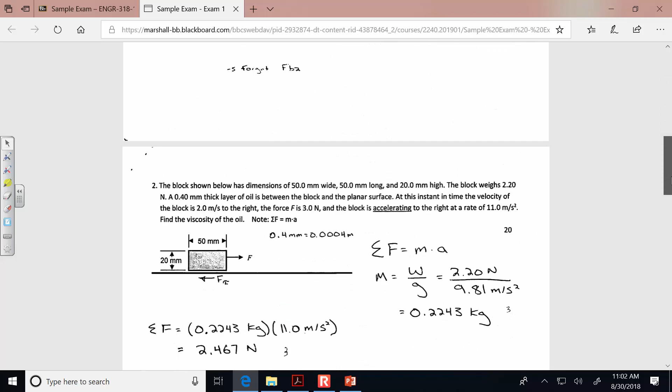All right, so here you can take a look - usually for our exams there will be 3 questions, sometimes 4. But what I'd do is instead of having 3 longer questions, I'd have 2 longer ones and 2 shorter ones. Usually the exam is 3 pages long, and you'd have 75 minutes to complete it in class.

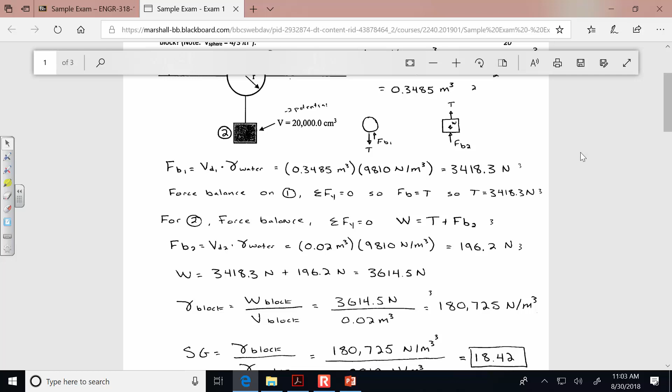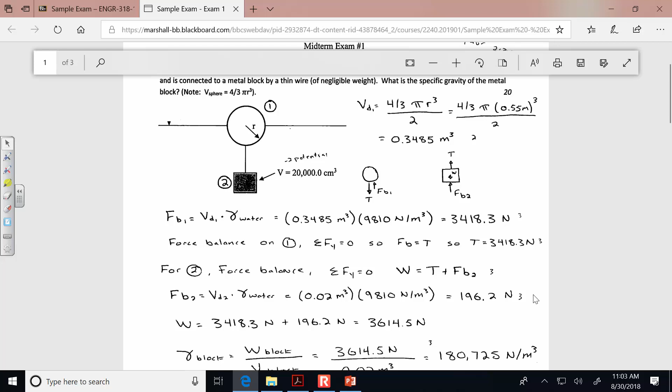And so you can see on this one, if it's worth 20 points, I'm kind of breaking out where the points are earned. So if you only do part of the question, you get part of the credit. And so there you have it - there's a sample exam online. You can look over it and get a feel for what to expect on the tests.

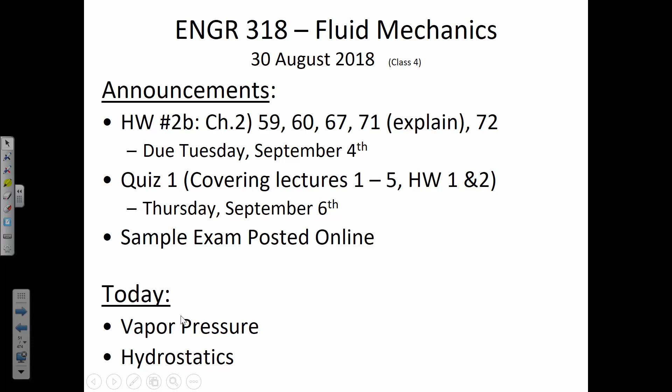All right, so today we're going to be talking about vapor pressure and hydrostatics. And what's going on in this picture? What are we looking at? Boiling water, right. And in this case it's boiling water because heat was added.

It doesn't seem like that's something that should need to be clarified, but there's more than one way to boil water. It just happens that in this case the water was heated to get it to boil. Why do you have to heat up water before it will boil? Why won't it just boil at room temperature? Are there other things that will boil at room temperature? What's an example? Like if we had a liquid, just a container of it, sitting in this classroom, what would boil at room temperature? Propane, butane, right - yeah, those are liquids when they're compressed, but they want to go into the vapor phase at our normal room temperature and pressure.

Water, though, will go into the vapor phase too. When I say phase, there are 3 states of a fluid like water. It can be ice as a solid when it's below 0 Celsius. It's water within a relatively narrow band of temperatures from 0 to 100 Celsius. And then after 100 Celsius, the water wants to become a gas. So that's what's going on here - the water has been heated up to a temperature where it wants to be in the vapor phase.

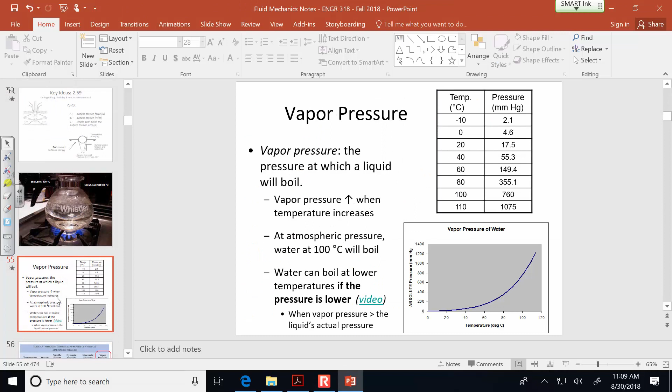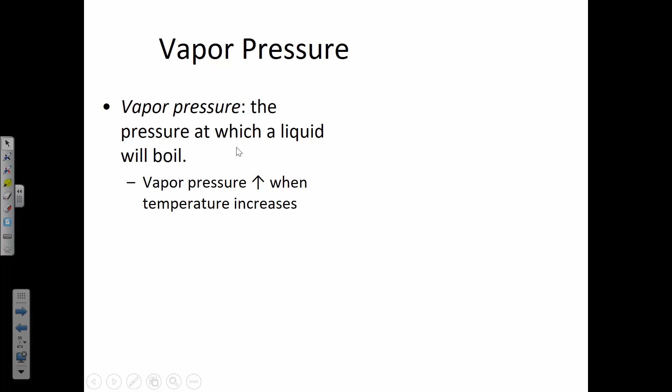The term vapor pressure is the pressure at which a liquid will boil, and vapor pressure goes up as the temperature increases. Here's a table that illustrates that temperature dependence.

When water is cold, it has very little kinetic energy, very little molecular movement, and so there isn't enough pressure within the liquid to get out into the atmosphere. But at 100 degrees Celsius, there's an equality between the vapor pressure of water and the atmospheric pressure. This is measuring pressure in terms of millimeters of mercury.

If you remember from chemistry, one atmosphere equals 760 millimeters of mercury. So at 1 atmosphere, the vapor pressure of water is 1 atmosphere at 100 degrees Celsius.

It's ironic to see that there's still a vapor pressure below zero, so ice can evaporate. There is sublimation, which is the direct transfer of water from the solid phase to the gas phase. Here's a graph of this same data.

What it shows is a nonlinear response, so as you heat up the water, the vapor pressure increases dramatically as you approach the boiling point. At atmospheric pressure, water will boil at 100 Celsius. The water can boil at lower temperatures if the surrounding atmospheric pressure is lower.

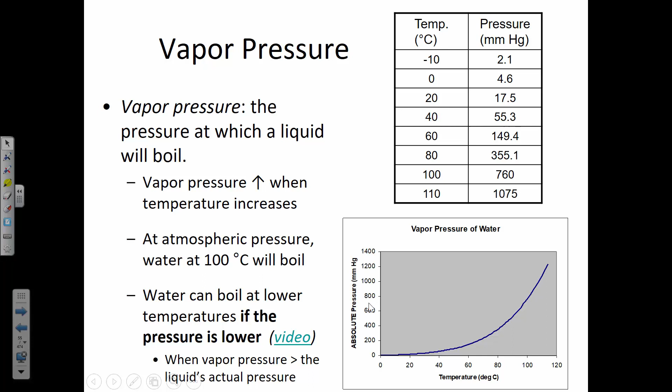So let's watch this video.

You got the clue when he put his fingers into the water that it wasn't hot. He was fishing out the pasta in a way you probably wouldn't put your fingers into boiling water. In fact, quite the opposite, if you let the water continue to boil over the long term, it would freeze, which is really unexpected.

The reason is that for water to go through a phase change, from liquid to vapor, it consumes energy to cross that transition. In chemistry you may remember you have to add a certain amount of heat to melt a certain amount of ice, there's a constant, you can look up how many joules it takes to melt a kilogram of ice. Even though the temperature stays at 0 Celsius through the melting process, it still takes energy to go through it. In the same way, it takes energy to go from liquid to vapor, just to push through that barrier.

So the energy comes from the water, and over the long term, that water will get progressively colder and colder as it's boiling, and then it turns to ice. I found another video that shows this process, where they left it in for several minutes with a thermometer, and you see the temperature decreasing until it starts to form ice crystals.

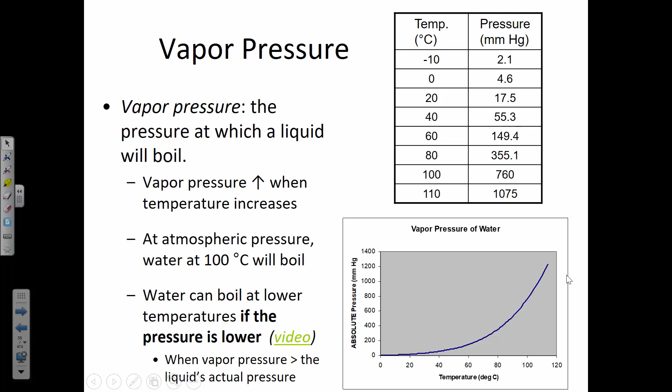Here's another table that illustrates vapor pressure. This is table A5 in your book. The appendices at the back are where, for homework problems, you can look up the vapor pressure at a certain temperature. Here's just another kind of fun gee whiz.

Now, vapor pressure is important in civil engineering, mainly because of the damage that boiling water can do to pumps, pipes, and other engineered structures.

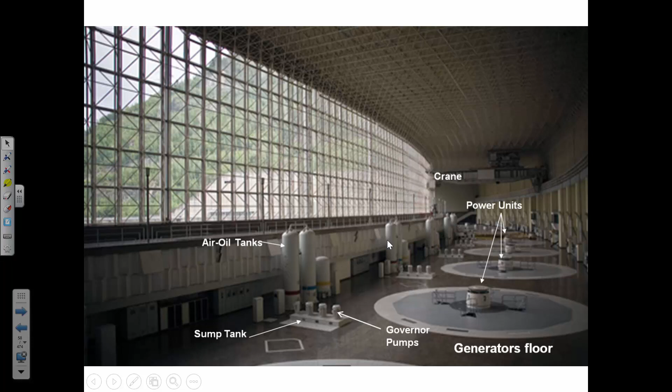There was a dam, with emphasis on the word 'was' - in Russia. The dam's still there, but the power plant isn't. It generated a lot of electricity, a really sophisticated operation, and the electricity was used for aluminum smelting. So the dominant industry in that part of Russia was very closely tied to the availability of cheap and abundant electricity generated by that hydropower.

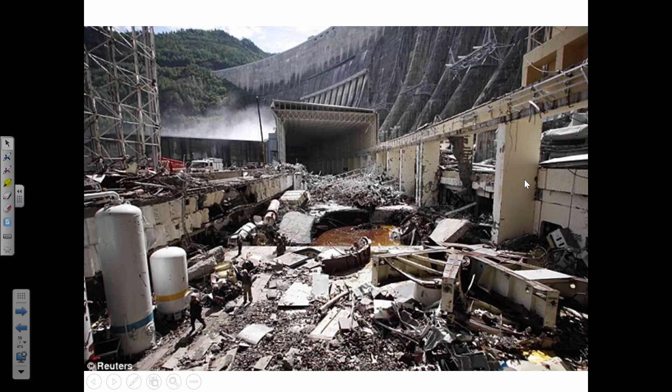Unfortunately, what happened was the place exploded because of something called cavitation. Cavitation is when water is moving very quickly, sometimes its pressure decreases. We're going to be talking about the Bernoulli equation and why there's a relationship between velocity and pressure. But the main thing you need to know is that the water pressure decreased, and in fact got so low that it began boiling inside of the pipes.

When that happens, these little air bubbles form inside the water - cavitation bubbles - and when they collapse, they send a small shock wave through the water, causing corrosion and pitting of pipes. In fact, there have been some dams in the United States threatened by cavitation.

Back in 1983, 1984, there was a really wet spring out in the western United States, and there was - we'll look at pictures later in the semester - a dam that was really heavily damaged because of the same issue of cavitation.

Is that something that can be prevented? It can, yeah. There's a way of assessing the risk or potential for cavitation. In hydraulic engineering, we'll go through calculations for what's called net positive suction head, NPSH, to look at the risk of cavitation. If you get close to that threshold, you choose to construct with different materials - maybe armor the concrete or use a smoother pipe that won't be damaged by the pitting and corrosion those shock waves can cause.

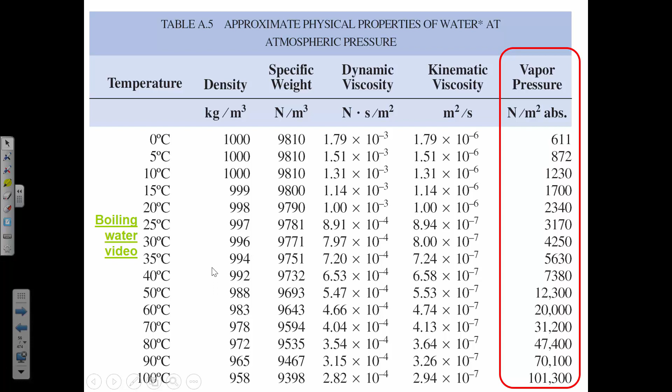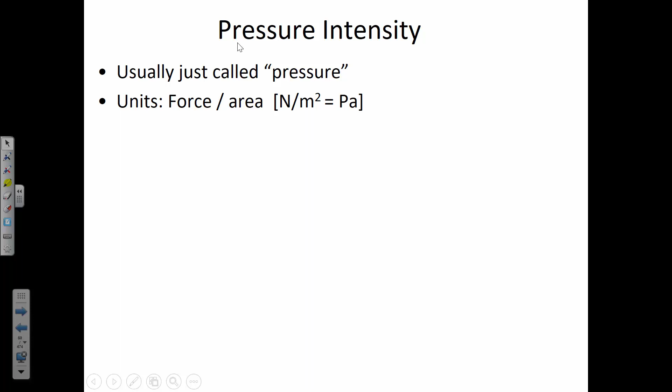I showed you this slide previously when we were briefly talking about pressure. Pressure intensity is usually just called pressure, and the units are force per area. A Pascal is a Newton of force over a square meter of area. That's a Pascal. Pressure acts in all directions equally. It doesn't have direction, it just has magnitude, so it's a scalar.

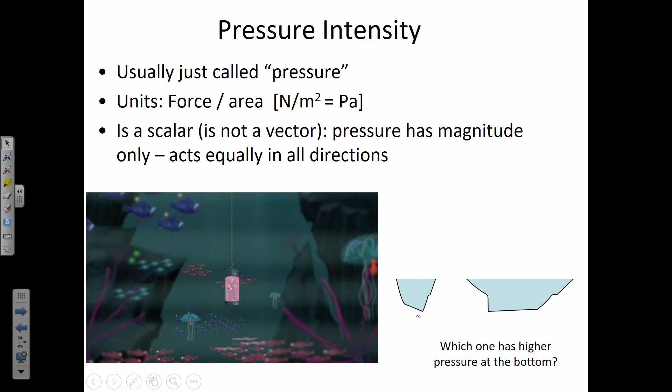You saw right through this trick question I was going to ask about which has most pressure at the bottom, and someone correctly mentioned that it only depends on how deep the water is. It doesn't depend on how wide the body of water is. The pressure at the bottom is dependent on your depth.

So the hydrostatic equation is the formula we use to quantify that. If we have a tank of water, let's say for a starting point we measure our elevations relative to the bottom of the tank. Our elevation datum is here at the bottom of the tank, and we go up some distance and get to the surface. At the surface, the interface between the air and the water, pressure is the same as the air pressure where they touch. But when you go down below that interface, the pressure is gradually increasing, at the rate of gamma.

Gamma is the unit weight of the fluid. Does anybody remember the units of gamma? Gamma has units of newtons per meter cubed. So what we're talking about with unit weight is how much weight is there in a certain volume of water. The hydrostatic equation says as you go down through water, the pressure is going to increase a certain number of newtons per meter squared per meter of depth - newtons per meter squared per meter. For water, the typical unit weight, unless given some temperature specification, is generally 9810 newtons per meter cubed.

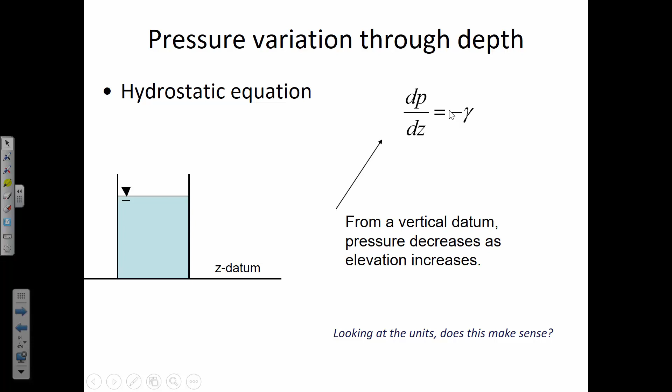Assuming uniform density - meaning if you're going down through a fluid that's just a continuous body of that same fluid, not going through different types of fluid - so assuming continuous density, we could integrate this hydrostatic equation to get piezometric pressure.

Okay, so we rearranged this, and piezometric pressure is saying for a certain location where you're keeping track of your elevation Z above a datum, then pressure plus gamma Z is equal to P sub Z, piezometric pressure. You can rearrange piezometric pressure by dividing each term by gamma, and piezometric pressure can instead be expressed in terms of piezometric head.

The hydrostatic equation says that piezometric head is constant in a fluid. So between 2 points inside this fluid, if this is a liquid, and we've got 2 locations we're interested in, this equation means that if you go down, your Z is decreasing, but the pressure head term is increasing by the same amount. So there's an exchange between elevation and pressure as you go through the fluid.

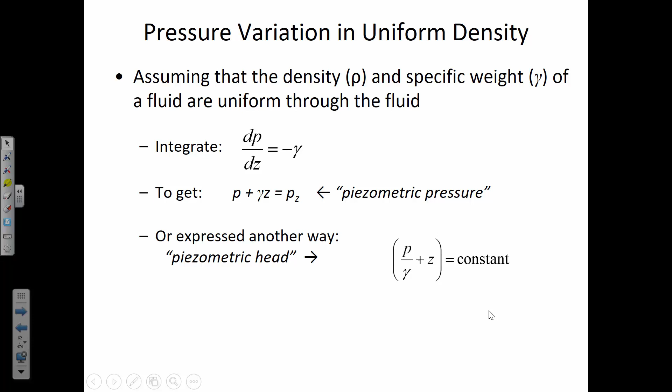Now what happens if you go, so I drew this little line here. If we go down, the pressure is increasing. But what about if you go sideways? What's happening to the pressure then? There's no change. It's just as you go upward and downward vertically through the fluid that you experience a pressure change.

So we can rearrange this original hydrostatic equation, and this is the form we'll use more frequently. What it's saying is: pick 2 points of interest. If you know the pressure at one of them and the elevation at both, then you can calculate the pressure at the other location.

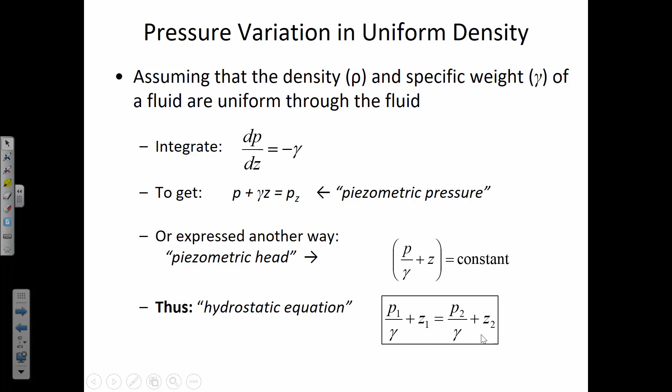So we've got 4 variables here. If we know 3 of them, we can predict the 4th. So let's put that to practice.

Let's say that we have a tank of water here, and we're measuring some elevations according to a datum. Maybe it's the bottom of the tank, maybe it's sea level. It doesn't really matter. We've got some datum, and we're measuring our elevations to both 1 and 2 from that same datum. We know the pressure at 1, and we want to find the gauge pressure at 2.

All right, so we first look at what data we have. At 1, we have the gauge pressure. So what I'd like you to do is, hopefully everybody brought their calculators today, see if you can calculate P2 using this hydrostatic equation. First, calculate it in terms of the gauge pressure, and then for part B, find the absolute pressure. I won't remind you quite yet how to convert between the two, because I want to see if you remember. But we will go over it in just a minute.

Okay, so I have the solution up there on the screen if you want to check you're headed in the right direction. So what we're starting off with is this hydrostatic equation that says the pressure head and elevation head at one location is going to equal the pressure head and elevation head at the other location. That's how we would describe that hydrostatic equation in words.

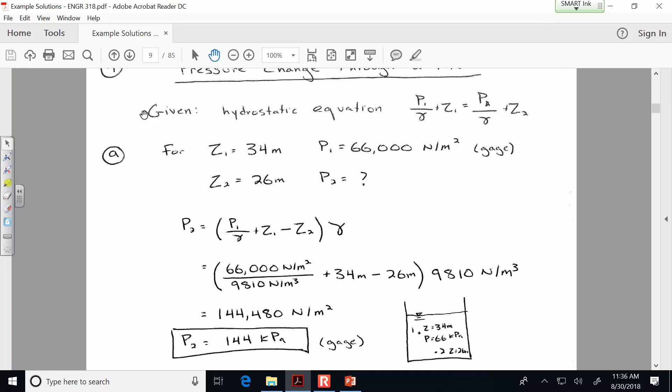So once you have the gauge pressure, what it asked is, what's the absolute pressure at 2? So absolute pressure at 2 is the gauge pressure plus 101.325 kPa. Okay, I'll give you a minute to finish writing that down if you're still copying or doing the calculations.

So this is exciting news, right? Now you can know the pressure at the bottom of the swimming pool. You just measure how deep it is, multiply it by the unit weight, and that's how much the pressure is at the bottom of the pool. Like you could know how strong your ears are. You can see at what depth it starts to bother your ears, and then equate it to a certain pressure.

Anybody here ever do scuba diving before? A few of you? It just seems dangerous. I don't know, we don't belong down there, you know? It's not like fish show up where they don't belong.

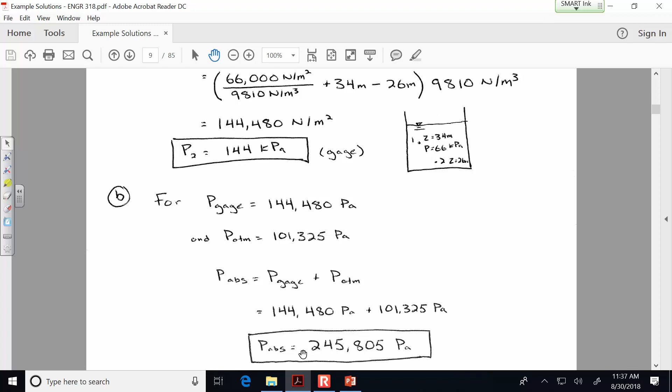There's whales on the beach all the time. Yeah, and are they alive? Yeah, briefly.

So here's the full version of the hydrostatic equation. We can always use this, but sometimes it's convenient to just express it in terms of a change in pressure. So the change in pressure between two points is delta H, the vertical depth, multiplied by the unit weight of the fluid. If you go down, the pressure is increasing. If you go up, the pressure is decreasing.

Here's an example: the Challenger Deep, the deepest point in the Pacific Ocean, off the coast of the Philippines in the Mariana Trench. Some of you looked up the pressure at the bottom of the ocean, right? You probably find that in lots of different sources, but let's calculate it. If the depth there is 10,911 meters, and it's seawater, the unit weight of seawater is a little bit larger than fresh water because of the dissolved salts, 10,100 newtons per meter cubed.

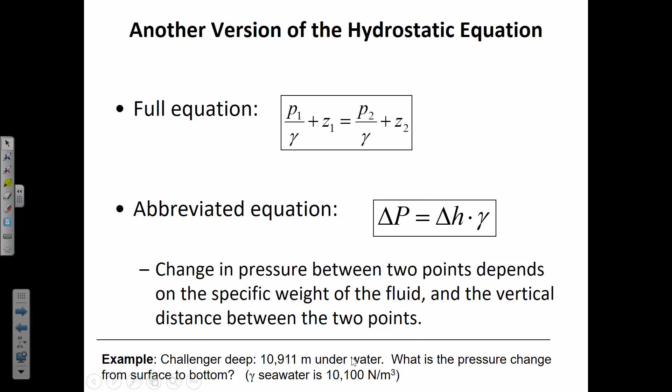Okay, so what if we have two liquids on top of each other? What if we have a layer of oil on top of a layer of water? What I'd like you to do is calculate the gauge pressure at the bottom of the tank. I've given you the specific gravity of the oil, the thickness of the layer of oil, and the total level of liquid in the tank is 4 meters. So get out your calculators and calculate the pressure at the bottom of the tank.

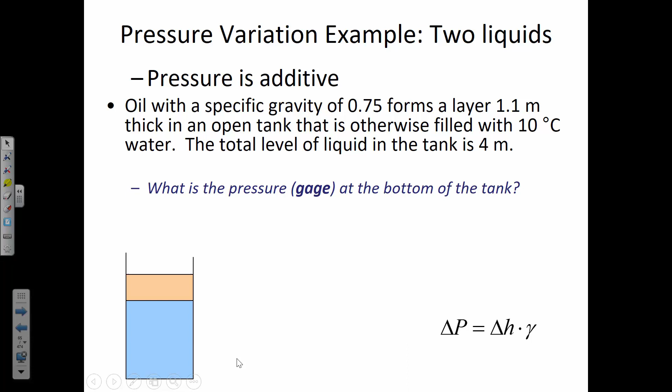Here's the hint: you have to go one liquid phase at a time. You go from the surface, which is an interface of gas and liquid, down to where the oil and water meet. Find out the pressure at the interface between the two, then go the rest of the way down to the bottom. There are two different unit weights, so the pressure is cumulative, additive—as you keep going down, the pressure keeps increasing. But you can only apply this hydrostatic equation within the same fluid. You couldn't go from top to bottom in a single step, because which gamma would you use? You've got two different gammas. So you have to do one step through the oil and another through the water. That's the hint.

Okay, so on the sketch I've labeled points 1, 2, and 3. By the way, it's not really a trick, but you have to get accustomed to using the dimensions given and converting to the dimensions you need. It said there's a 1.1 meter depth of oil, and the overall liquid is 4 meters. So that means the water thickness is 2.9 meters. Just because I said 4 doesn't mean the water depth you should put in there is 4.

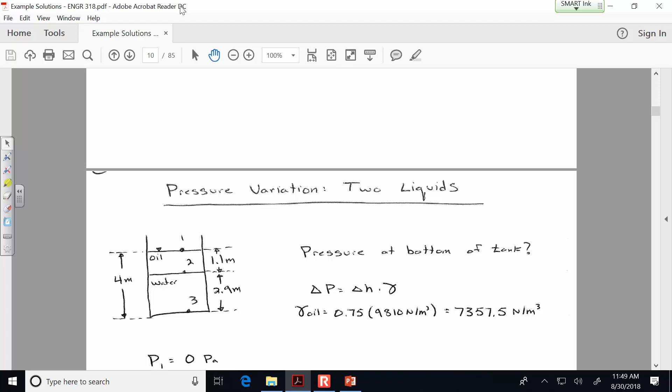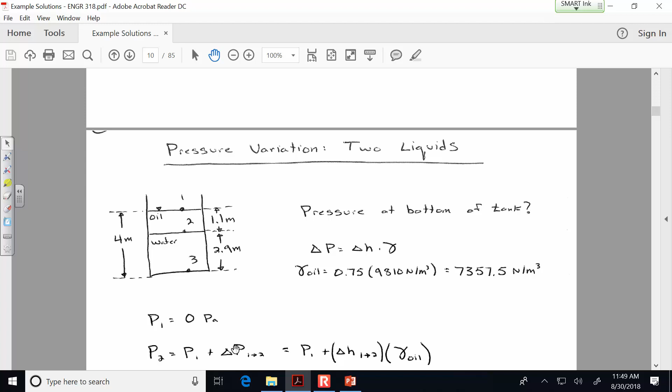7357.5 newtons per meter cubed. Now we just do accounting, like bean counting from here on out. Anytime you go down, the pressure is increasing. So P2 is whatever pressure there was at 1 plus the difference between the 2 points, which is an increase in the depth multiplied by the gamma.

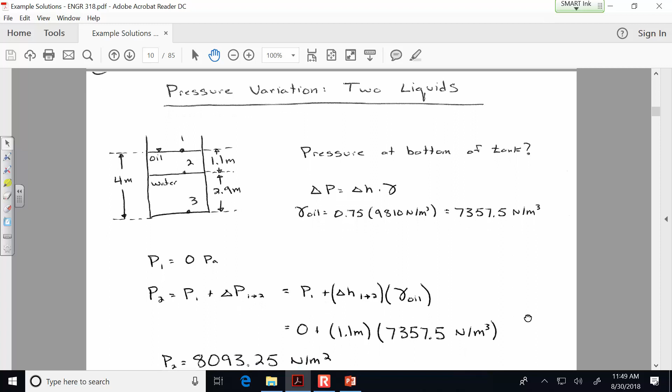So it was 0 pressure at location 1. The depth is 1.1 meters through the unit weight of oil. So we know the pressure at 2 should be 8,093.25 newtons per meter squared. So far so good. Any questions?

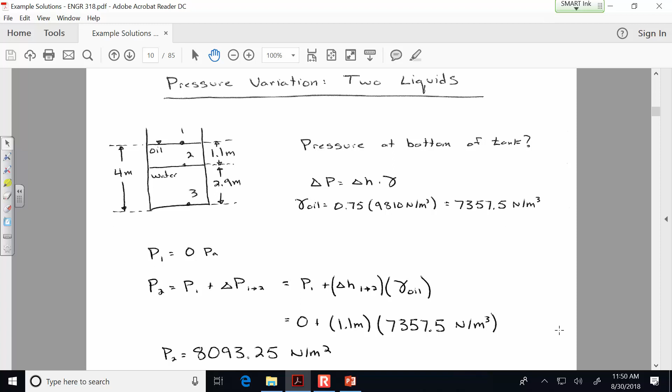So now we're at 2. If we put in a pressure probe right at this depth where the oil and the water are touching, that's the pressure it would be. As we continue to go deeper, the pressure is increasing, but now at a different rate because we're moving through a different fluid. That's why we have to use a different gamma for this next part.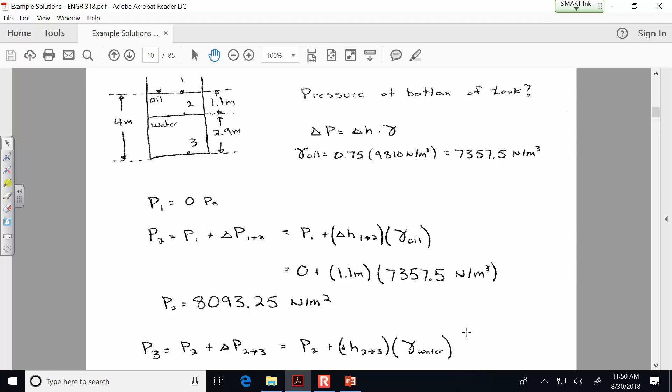So we'll set up this equation: the pressure at 3 is the pressure at 2 plus the change. And the change is the depth times the unit weight of whatever this new fluid is, in this case water. So it's going to be the pressure that there was at 2 plus the change, and the overall pressure at 3 should be

36,542 pascals. I see some heads nodding, I think you got the right idea. Any questions about this example before we move on to one that's slightly more complicated?

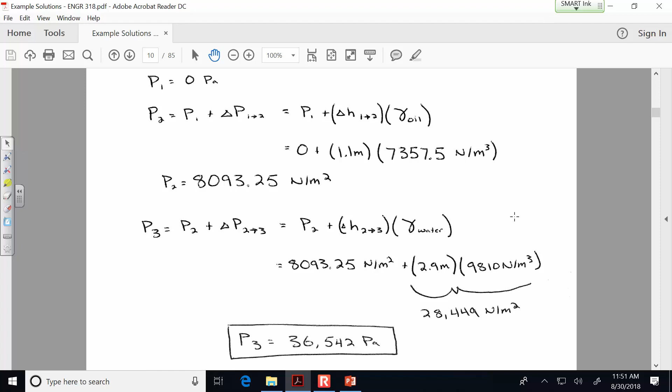Okay, our last example for the day before we take a look at some key ideas from homework problems. Well, what if we have 3 fluids? We combine all the ideas here. I tell you the specific gravity of an oil, the density of water, and the unit weight of this last fluid is not known.

So actually, we're going to use the change in pressure to be able to calculate the unit weight of this last fluid. This is a new example, so if you're flipping through your lecture notes wondering where it is, this is a bonus. You're getting more for your money this semester than the guys last semester got.

Good. I can tell you're excited.

All right, so what I'd like you to do is find out what is the gamma of this purple fluid, the same procedure that I followed before. My suggestion is that you start off by numbering the layers. Maybe we'd call this first, the air-oil interface, 0, then here's 1, 2, and maybe 3 is that dashed line. That's the depth.

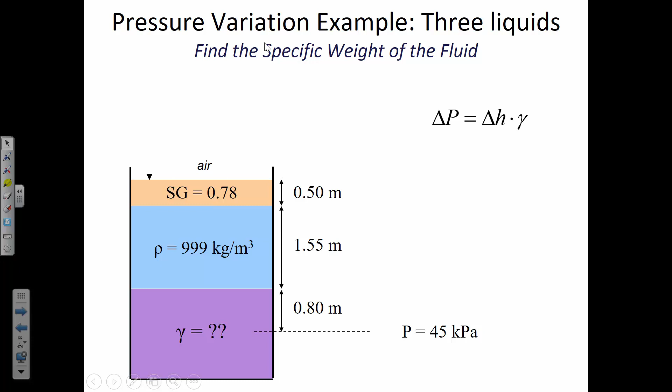But I'm going to stop this recording. I'm going to stop talking and give you a chance to collaborate with your classmates and calculate what's the unit weight of that fluid. This is the type of question you could expect to see on a quiz. I've already posted the sample exam online, but I think this is a quiz length question where in 7 or 8 minutes you should be able to solve for the gamma of the fluid.

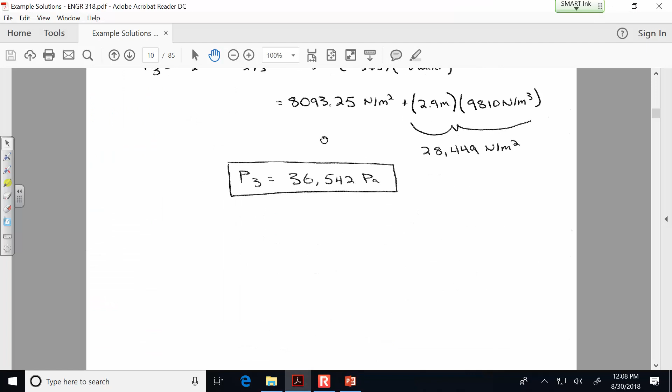All right, I was very gratified with what I saw. So we started off with the pressure of the air is 0 if we're measuring the pressure relative to the air, and so I called that layer 0. Then at interface 1, which is where the oil and the water touch, to find the pressure there, we have to first of all know what's the unit weight of that oil.

And since this oil was a slightly different specific gravity than the last example, we have to calculate a new unit weight. So at 7651.8 newtons per meter cubed. And remember, I'll make the commitment to always write my units in every example I work. I do that not because it's fun to take the extra time, but I just think it's a good habit to be in.

So I'm trying to set a good example for you. Although my reflex is the same as yours, do things as quickly as possible with the least amount of effort possible, it's worth putting the units every single time. So that's why they're there. So we're going down 0.5 meter through this oil. The pressure at 1 is 3825.9. Then I have this statement: the pressure at 2 is the pressure at 1 plus the difference, and there's a certain amount of increase as we go down through this water layer.

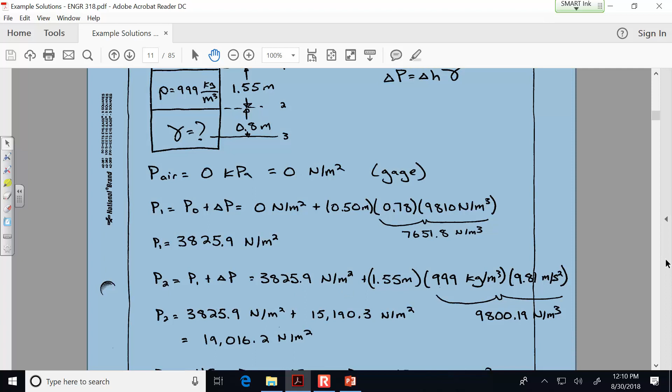And then finally, this last step: we know the pressure at 3, and the difference between 2 and 3 is this delta P. So the delta H that was responsible for the increase in pressure—if we put in the delta H and the delta P, then we can calculate the gamma. In a way, we can find out the unit weight of the fluid by measuring the pressure difference some depth into the fluid. So the unknown here wasn't what's the pressure at depth, but rather what's the unit weight when we have observed pressure at depth.

Any questions on that example?

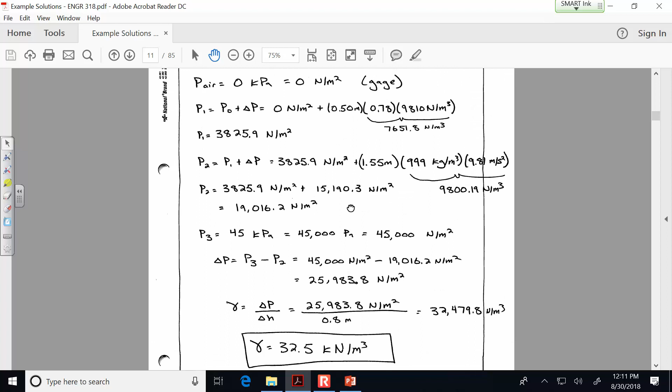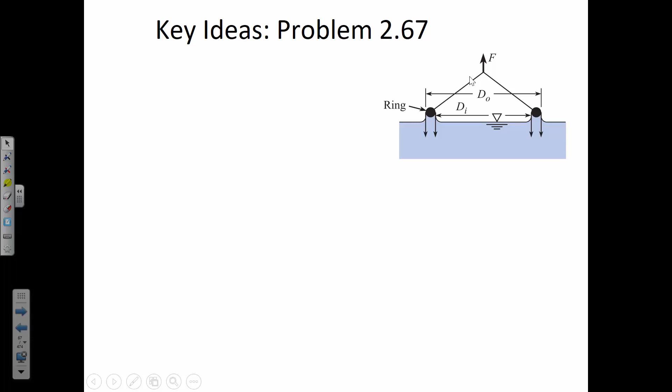Let's look at some key ideas from the homework that you've got coming up. Okay, this problem 67: there's a ring that's a circular ring, and this diagram is just a cross-sectional view. You're trying to use this ring to quantify the surface tension constant for the fluid in question. We know the mass of the ring, we know the inner and outer diameters, and we know the force—how much we have to pull it up, because the water is continuing to hold on to this ring.

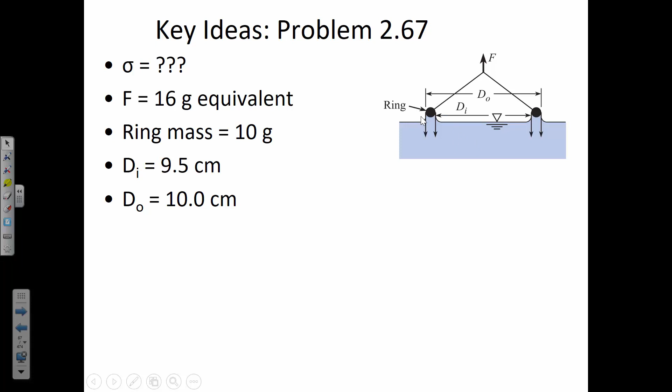But the length—there's two lengths that are important here. There's the inner circumference and the outer circumference, and it's both of those together that's responsible for this force that you have to pull upward to get the ring out of the fluid. So I just wanted to point out that this length is the sum of the inner and the outer circumference.

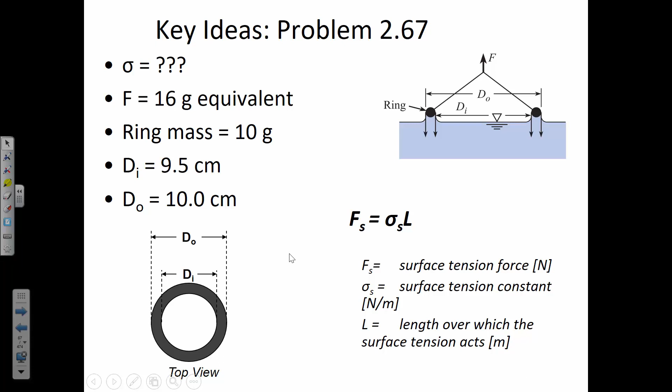And what's the formula for circumference? Pi d, right. In math, you do a lot with radius, but for whatever reason, in fluid mechanics and hydraulic engineering, it's just more common for us to express things in terms of the diameter rather than the radius. I guess because if you're out in the field measuring a pipe, it's just easier to measure from outside edge to outside edge and say here's the diameter, than trying to estimate where's the center and hold your tape measure up to some center point that doesn't actually exist on the pipe. So it's easier to measure diameter—I guess that's probably why we use it.